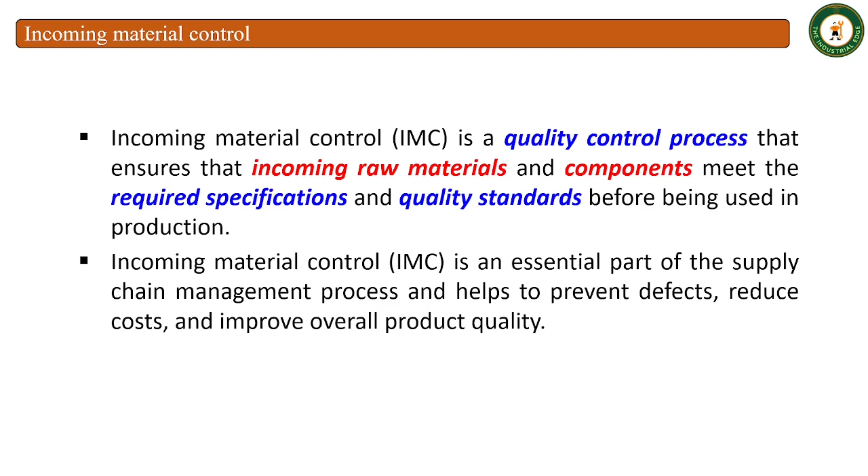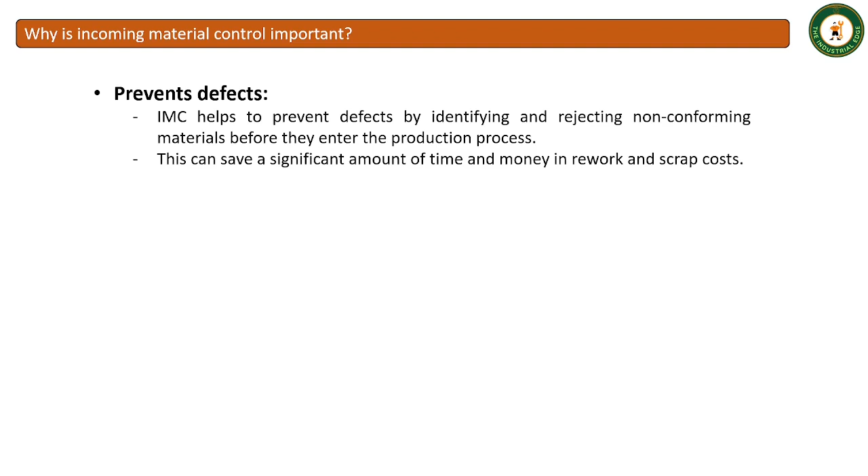Why is incoming material control important? First, prevent defects. IMC helps to prevent defects by identifying and rejecting non-conforming materials before they enter the production process.

Also, this can save a significant amount of time and money in rework and scrap cost. Second, reduce cost. Incoming material control can help reduce cost by preventing the purchase of substandard materials that may require rework or lead to product recall. Also, it can help improve supplier performance by providing feedback on the quality of their material.

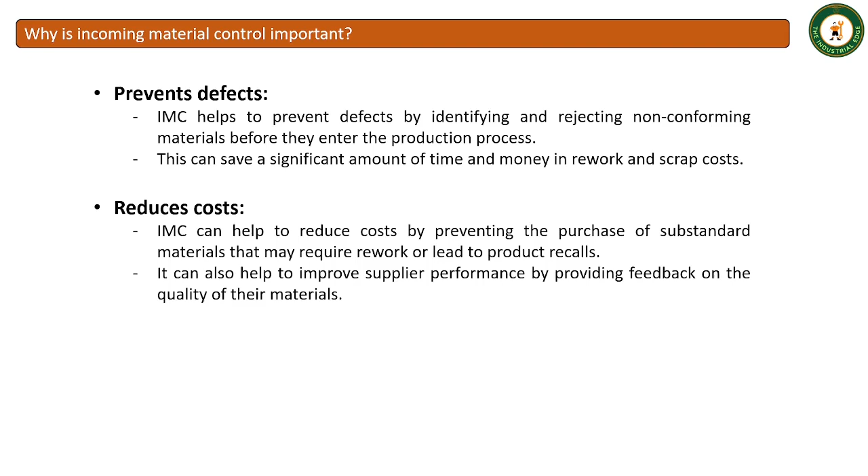Third, improve product quality. Incoming material control can help improve product quality by ensuring that only the highest quality materials are used in production. Also, this can lead to increased customer satisfaction and a better reputation for the company.

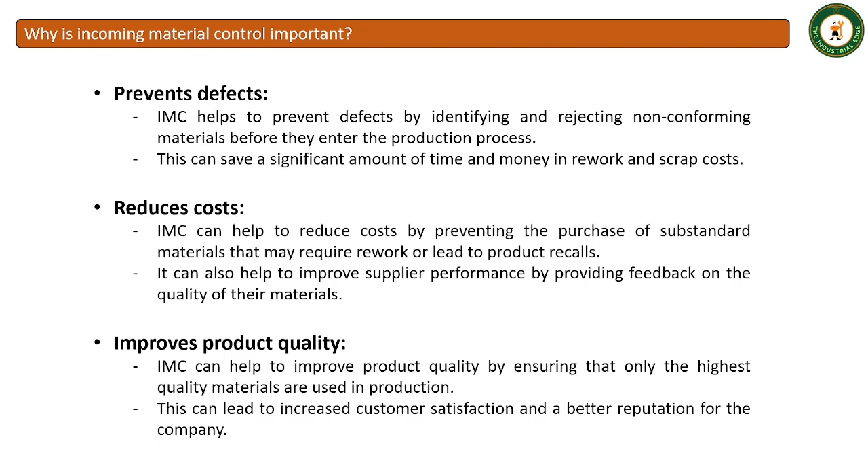Now, how does incoming material control work? The specific steps involved in incoming material control will vary depending on the company and the type of material being inspected. However, the general process is as follows.

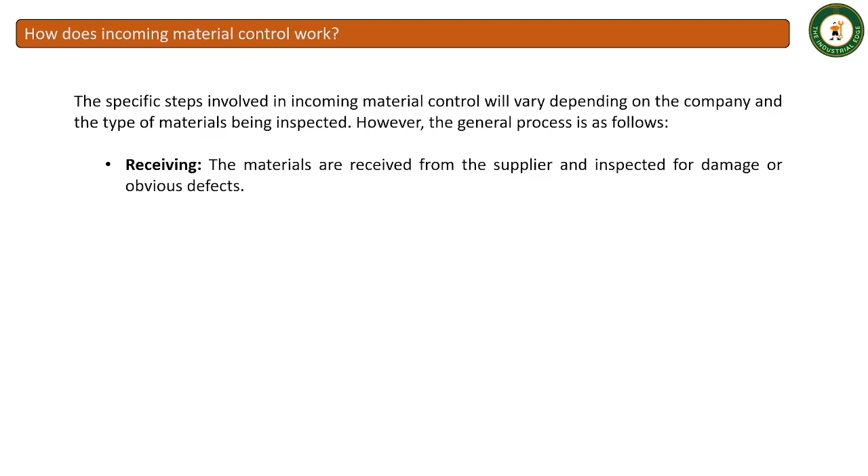First, receiving. The materials are received from the supplier and inspected for damage or obvious defects. Second, identification. The materials are identified and matched to the purchase order to ensure that the correct materials have been received. Third, inspection. The materials are inspected for conformance to the PO specification.

This may involve visual inspection, dimensional inspection, or testing. Fourth, acceptance or rejection. The materials are either accepted or rejected based on the result of the inspection. Accepted materials are moved to storage while rejected materials are returned to the supplier.

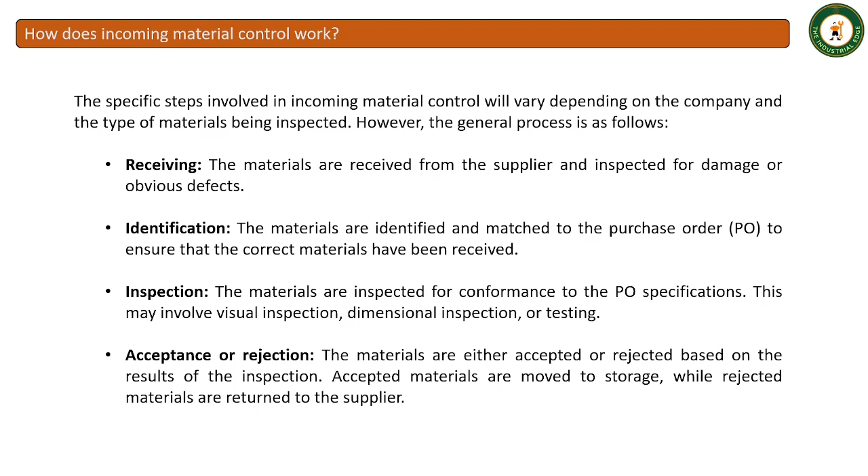What are the challenges of incoming material control? The first challenge, the increasing complexity of materials. As materials become more complex, it can be more difficult to inspect them for defects.

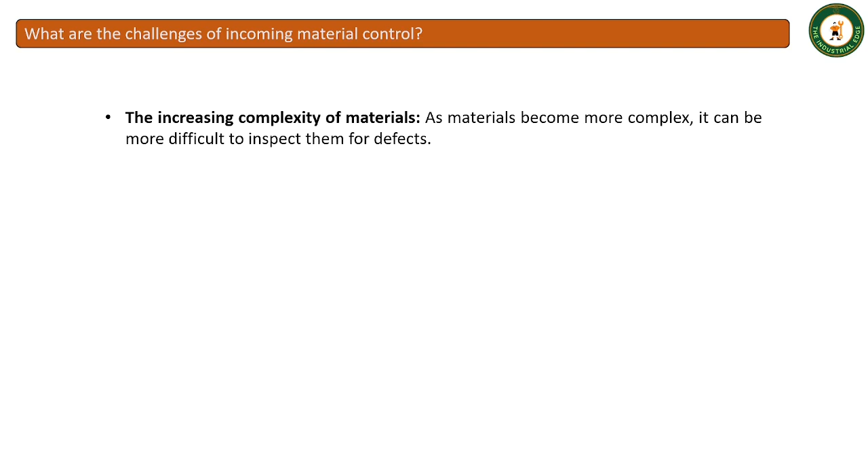Second challenge, the growing number of suppliers. Companies are increasingly sourcing material from a global network of suppliers, which can make it more difficult to ensure the quality of incoming material. Third challenge, the need for speed.

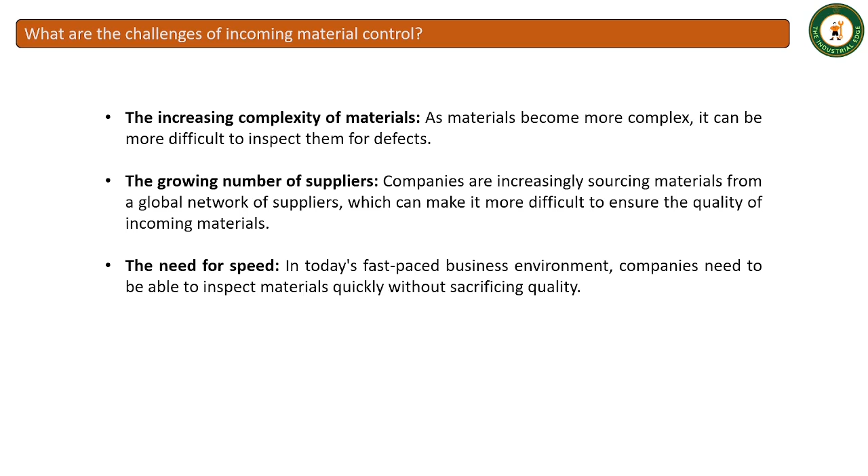In today's fast-paced business environment, companies need to be able to inspect material very quickly without sacrificing quality. Despite these challenges, incoming material control is an essential part of the supply chain management process. By implementing a robust IMC, incoming material control program, companies can help prevent defects, reduce cost, and improve overall product quality.